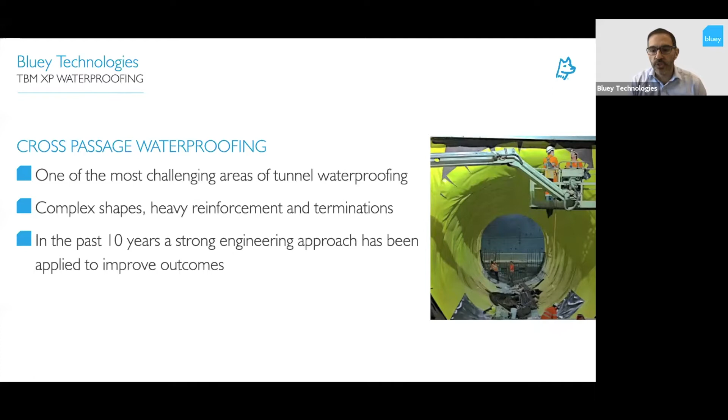So hopefully, by the end of this presentation today, you'll see how we approach it now and how we've taken an approach that puts some science into what we do and improves the outcomes.

So why do we need dry cross passages? You need it for durability of the structure, obviously, for the entire tunnel. It needs to be safe for access and egress, particularly in cross passages, because they're used for safety.

For the public to move from one tunnel to the other in the time of an emergency. And they often contain critical operation equipment as well, which can corrode. So you don't want groundwater getting in and affecting that equipment.

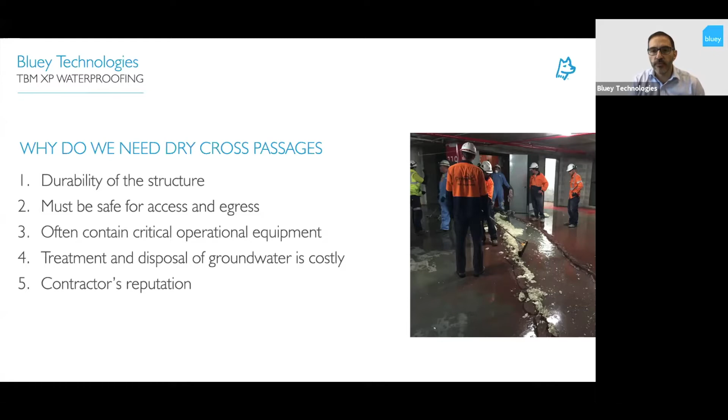Also, the treatment and disposal of groundwater is costly, so it adds to the total life cycle cost of the structure as well. And contractor's reputation becomes important when you have leaking cross passages. You have an unhappy client, I guess.

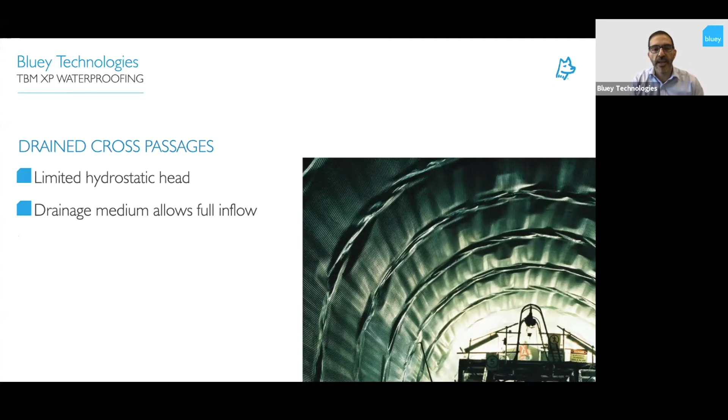So that's one type with lower pressure. And then also you have tanked cross passages, and this is where they're fully sealed all the way around, sealed to the tunnel itself, and full hydrostatic head is able to be created above.

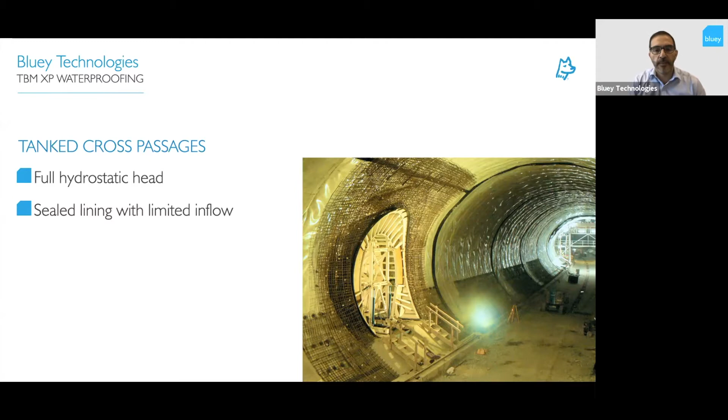And you could have 40, 50, 80, 100 meters of water head above that you have to seal against, and this is where we use a liner to seal on that.

So membrane selection - some of you who've sat in on the waterproofing basics last week will have covered some of this already, but I thought I'd just touch on the topics briefly again for those who haven't seen it, because it really is relevant, the type of membrane you select and then the type of installation methods as well.

So first, I thought I'd just quickly mention spray applied membranes. They do get used in cross passages because they're perceived to be fast to apply and they can conform to the curvature really easily. And as I said, cross passages are fairly complex structures, but they can only be applied to dry surfaces.

So the idea of trying to apply a spray applied membrane to that is always going to be a challenge. It's difficult to apply because of the dampness, also the quality of the rock. You also can't complete a pressure termination.

So where that membrane meets the segments, you can get a little bit of bond there, but you're only relying on bond. And then how do you connect that membrane through to the gaskets in the TBM segments? We'll talk about that in a moment as well.

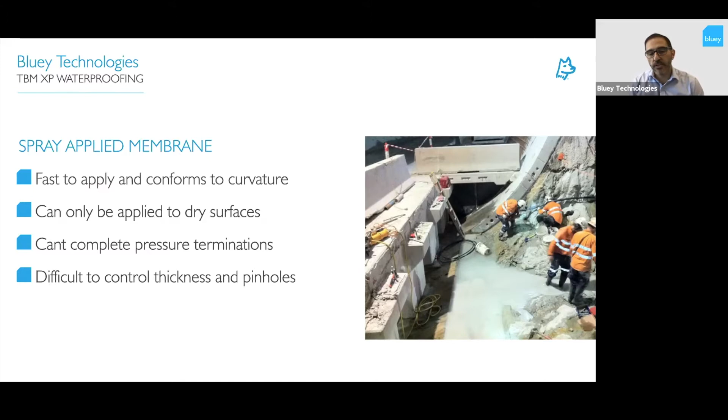So needless to say, I'm not a fan of using spray applied membranes in cross passages. I haven't seen many, if any, successful applications using those methods. So what we'll focus on is sheet membranes as the preferred method of waterproofing cross passages.

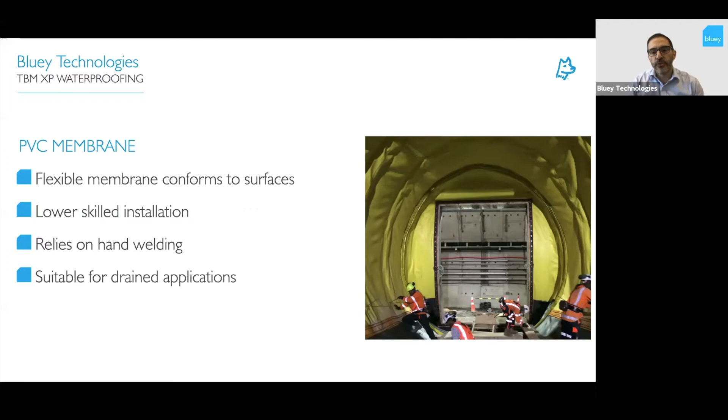So it's a flexible membrane. PVC is one type. There are two types we typically deal with. PVC being a softer membrane, it's a little bit more flexible, it'll conform to surfaces, usually requires lower skilled installation, relies on hand welding, mostly for the complex welds, and it's usually only suitable for drained applications rather than tanked applications.

VLDPE membrane, on the other hand, is a lot more robust. It can also be extrusion welded, and I'll talk about the different welding methods. It has the highest resistance to damage in a tunnel, which is important when you're dealing in such a confined space. It also has chemical resistance. It does require a higher level of skill from an application point of view, but it really is the membrane you need to use where you have a specification that calls for no damp patches and you're trying to resist high water pressures.

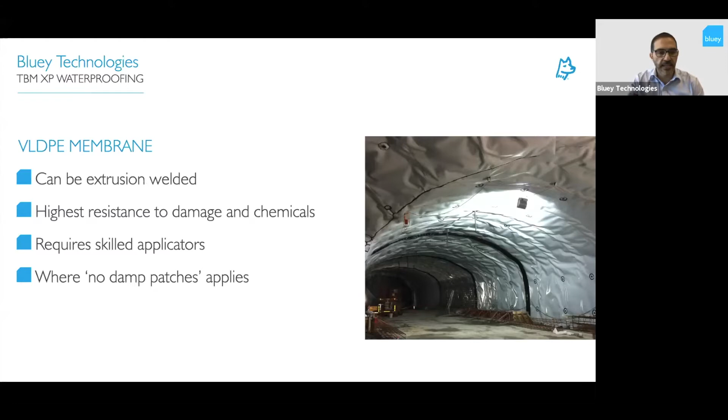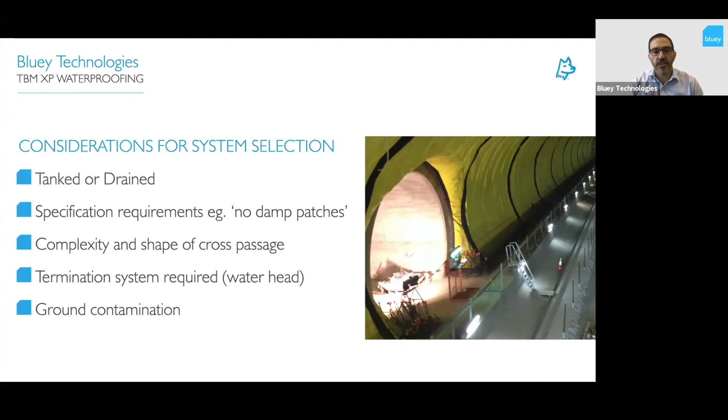So this would be the membrane you used in a tanked cross passage. The different considerations when it comes down to selecting a membrane: you need to ask, is it tanked or drained? Does the specification have certain requirements that need to be met, like, are there no damp patches required? Is there a complexity of shapes? Because cross passages are always in various shapes and require different types of welding. What is the termination system required and what pressure head of water are you trying to resist? And is there ground contamination? So these will determine what type of membrane you end up using.

So membrane welding, just to cover it off again, as I said, we spoke about this last week. Double seam welding is the primary welding technique. You use this as often as you can. In cross passages, it's a little bit more difficult to use this method of welding, just because there's so much three-way curvature. This type of welding works well in straight runs, but doesn't work well in curves and short runs. It's very reliable, provides consistent results. It's all machine and computer operated.

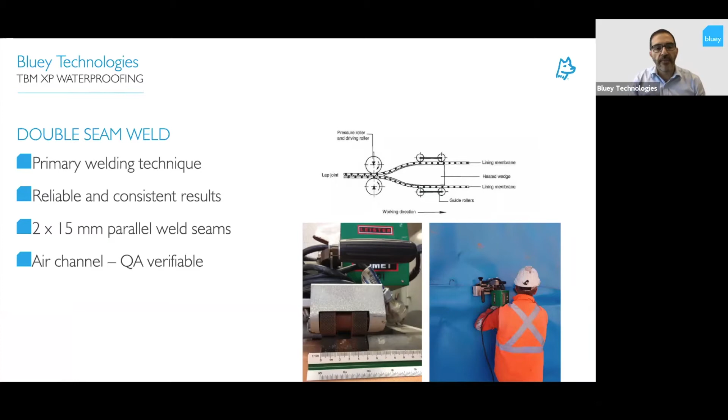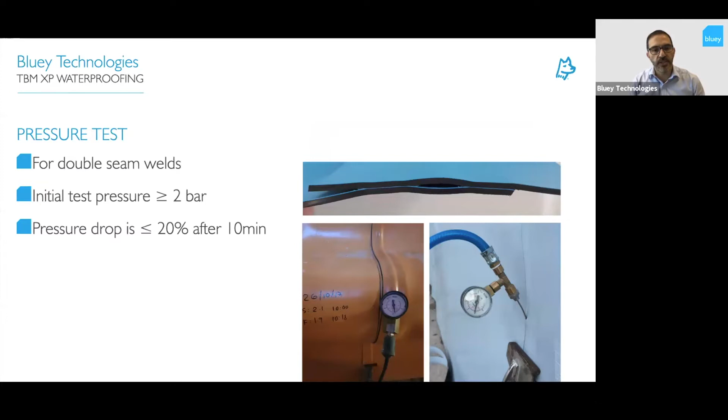As you can see, you've got the two rollers which create a double weld, and then you have an air channel in between, which means it can all be quality tested afterwards, as you can see in the photos here. So you've got the little air channel in that top photo, and you can see that the channel is being air pressure tested in the other two photos. So this is why the double seam weld is so reliable, but we can't always do that everywhere.

So where you can't do a double seam weld, you have to do a hand weld. And you can see in the photo on the right-hand side, all of those little black lines represent hand welds. That's been done with VLDPE, where an extrusion weld has been done over the top. So the black shows you that there's a hand weld in those locations. And as you can see in a cross passage, there's a really high density of hand welding required, which means that it becomes quite critical, because it's so commonly applied in a cross passage.

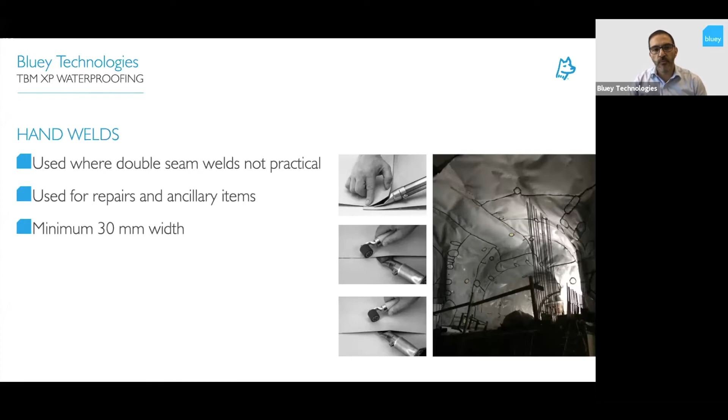And it relies on the applicator putting heat in, hand rolling, as you can see in those photos. So on its own, it's not so reliable, but that's all you can use in PVC type membranes.

When it comes to VLDPE membranes, you have the option of doing that extrusion weld over the top. And you can see in that top photo, the black HDPE, which has been molten and put over the top of a hand weld. And that provides a double weld, a second layer of protection on that weld to make sure that it's sealed. And it's only available on a VLDPE type membrane, which is why we use VLDPE membranes in critical applications, because you've got that double welding system. Not to say that we don't use PVC, I would say it's a 50-50 choice between the two, PVC and VLDPE. You just have to be mindful of the difference when selecting the membrane for the application.

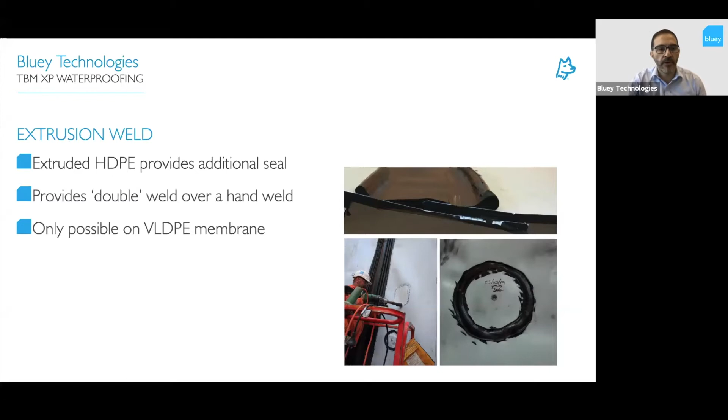So that's a little bit on membrane. Getting into actual cross passages themselves now, we can start talking about how we terminate the membrane to the TBM segments, because this is a really critical part of cross passage waterproofing.

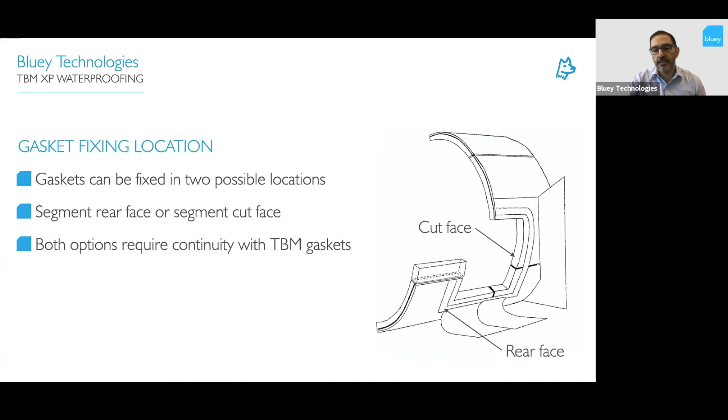The waterproofing membrane can be fixed in two locations. You can see in the diagram it can either be fixed to the cut face, where you saw cut your segments to create the opening, or it can be fixed on the rear face. I'll talk about both options in more detail, but both require continuity with the TBM gaskets—there has to be a seal between the fixing of the membrane and the gaskets in the TBM segments. Rear face fixing is being fixed to the back face of the segments.

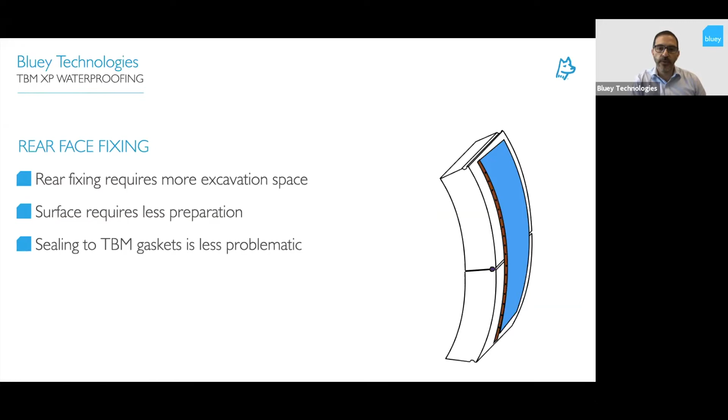The disadvantage with rear face fixing is that you need a bigger excavation face. You'll see in some of the photos I'm going to show that to be able to expose that rear face, you have to excavate out further. You have to allow space for a drill to get in there to drill those fixings, and it's actually quite a lot of extra excavation required to create that space. So you've got the advantage of a potentially better seal, but the disadvantage of needing more excavation space.

When you look at cut face fixing, you don't need as much excavation—you can just excavate straight up to the line of the cut, you don't need to excavate behind. Sure, it requires a lot of extra surface preparation because that cut face is going to be rough, it will have defects in it, and it may have the edge of the segment exposed, meaning dowel bar holes and other things that have to be fixed. There's also the internal corners where the vertical and horizontal faces meet—that becomes a bit of a challenge to create compression in that area, and also to make sure that area is clean and ready to accept a compression seal.

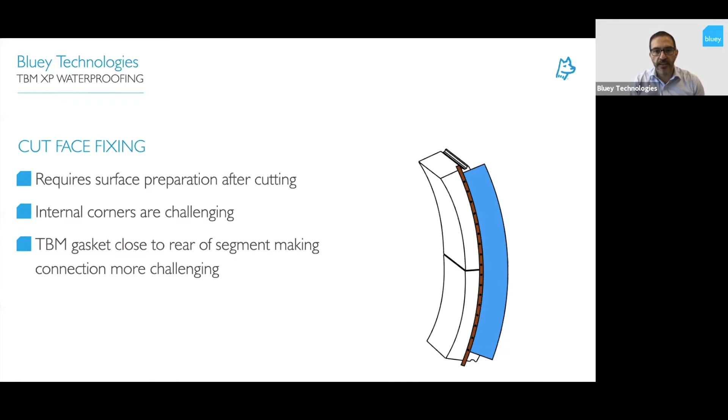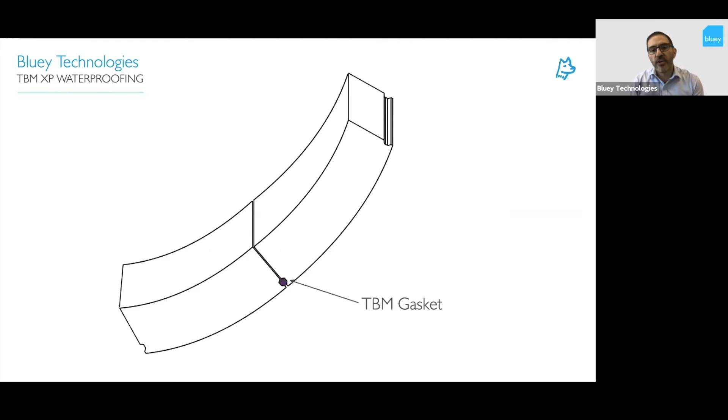What's caused more problems over the last couple of decades is that when you look at TBM segments, the gasket is actually moving further and further to the back of the segment, to the point now where I think the gasket has moved as far back as it possibly can, and it's been realised that that is the ideal position for a TBM gasket.

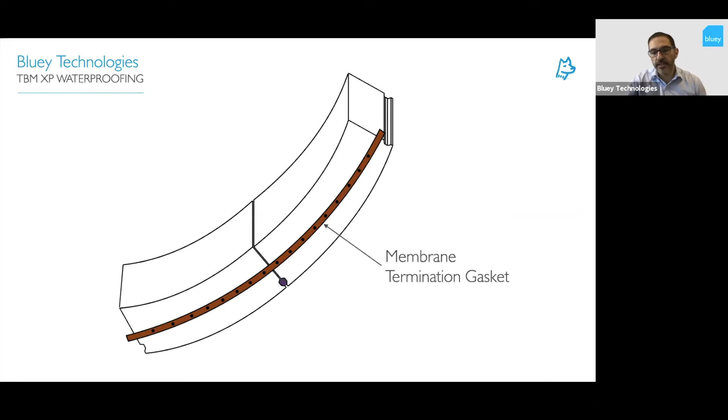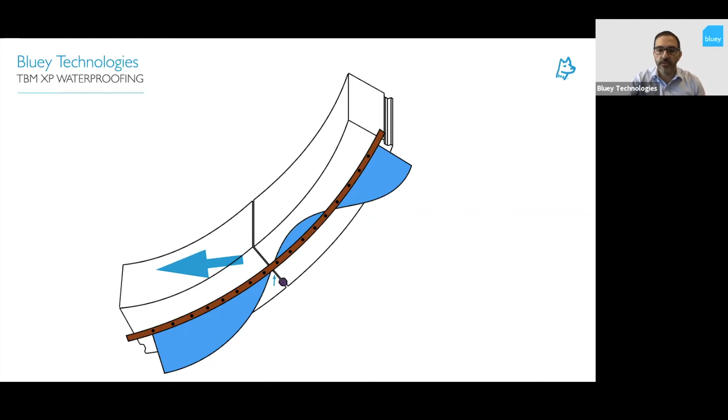When you go and put your compression seal ready for the membrane on, there's a gap between the two—that'll be at the midpoint of the segment—and then you'll attach the membrane. Just lifting that membrane back up, you can see that it creates a discontinuity between the TBM gasket and the compression seal you're creating. This is one of the most challenging areas in terms of achieving the waterproofing, because water can go in at that point, go around, and come out the other side. So it's really important to create that seal between the two.

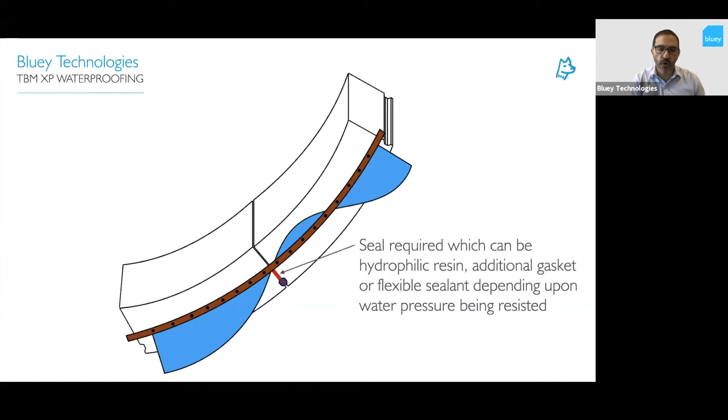That can be done in a number of different ways. It can be pre-injected into that joint with a hydrophilic resin. You can put an additional gasket in, or a flexible sealant between the two. It all comes down to the amount of water pressure being resisted, which determines the type of sealant, as well as the movement that's expected—whether you need something to accommodate large or high movement. But this has to be engineer designed, in the same way that the compression seal has to be designed, which I'll go into in more detail.

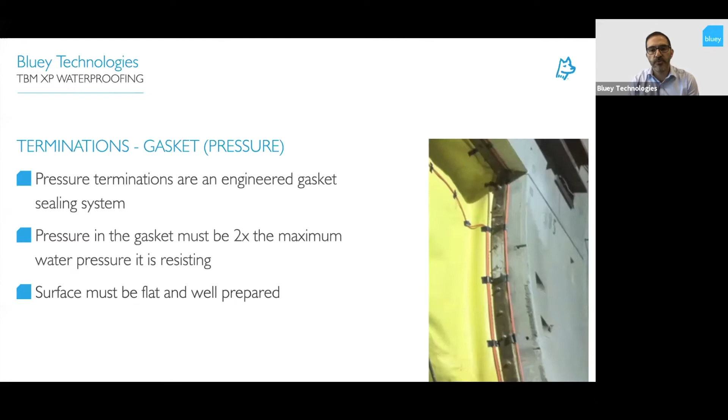The surface must be flat and well prepared. We use a couple of models to determine how this system is designed. We design the plate and the plate thickness, the plate width, the gasket hardness, the gasket thickness, and how much we compress that gasket to tell us how much pressure we're going to be resisting. So that's all part of the design.

For a typical 80-metre design, and this has been tested on a number of cases as well as being theoretical, we've set up mock-ups and tested this for projects. For a typical 80-metre design, you may end up with a 10-millimetre thick compression plate, quite a thick plate, 100 millimetres wide, with a 12-millimetre thick gasket with a hardness of about 50 to 65 Shore. And we'll typically compress that down to about 50% of its thickness.

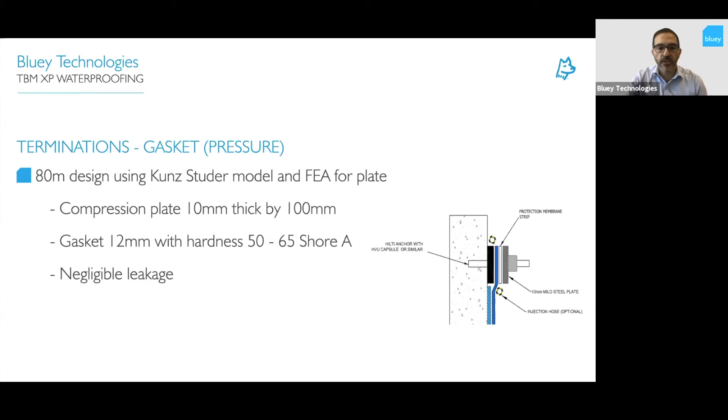That's how you measure it, and you ensure that you've got the seal, and you've got to be able to maintain that compression between the fixings as well to achieve that negligible leakage. So it's all part of the process of design, then install, then checking to make sure that you don't get any leakage. So that's compression gaskets.

We also utilise epoxy terminations in certain applications. They're typically only suitable for dry surfaces, which makes them a little bit problematic for cross passages. I don't like them for TBM cross passages simply because they don't have the flexibility needed. We all know that TBM segments will move as the pressure increases, and the epoxy won't tolerate that movement. So I would say that epoxy isn't suitable for TBM segmental line cross passages where you're going to have movement and where you have water pressure.

It is faster to apply, so it can be used in certain situations, maybe where you have a drained cross passage, particularly in a mined tunnel rather than a TBM tunnel.

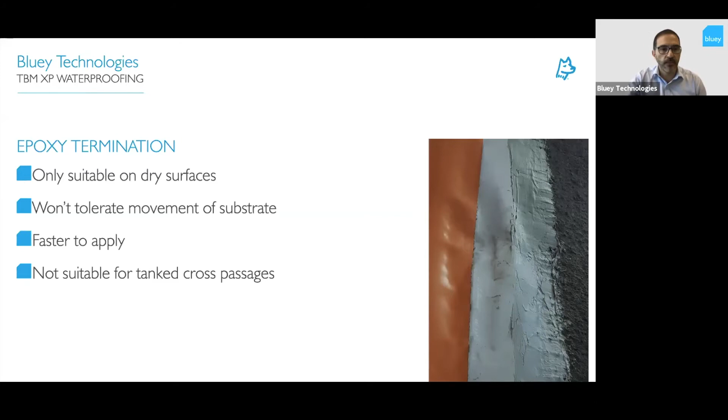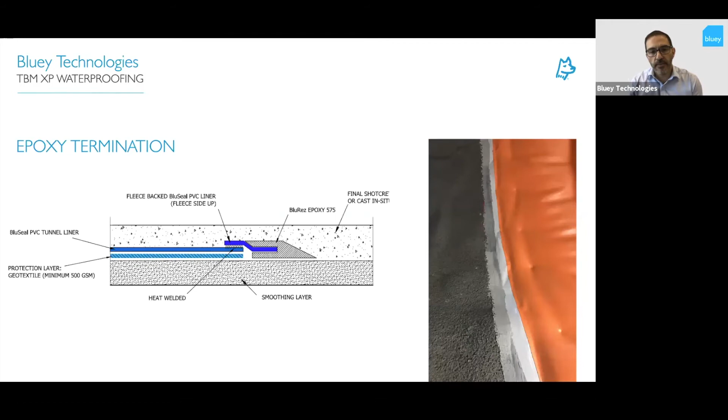This is how an epoxy termination looks. It's a piece of membrane which is fleece backed. It's bonded to epoxy, and then the membrane is welded and becomes continuous with that.

Some of the other waterproofing details to be considered are anchorage. So when you need to make fixings through the membrane, you obviously don't like punching holes in your membrane. So there are systems, the BA anchor is used, where you can install that into the rock. It has a sleeve around it which completely encapsulates the fixing, suitable for up to about 20 kilonewtons, and you can fix your reinforcement to it.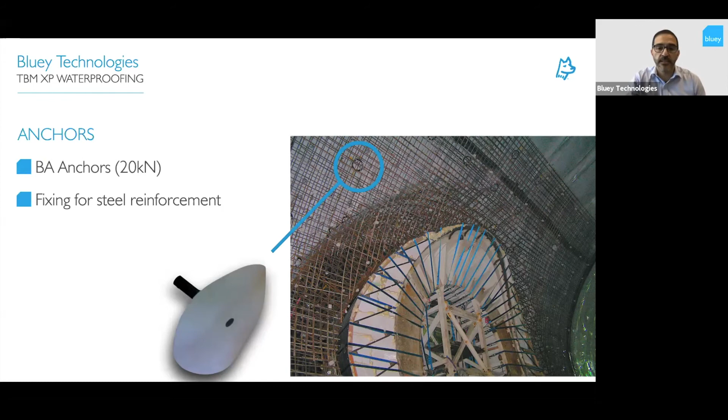You can see in the photo there, all of those little circles are BA anchors, which are holding that steel reinforcement in place. Steel reinforcement can be quite dense in a cross passage because the loads are quite high around that opening.

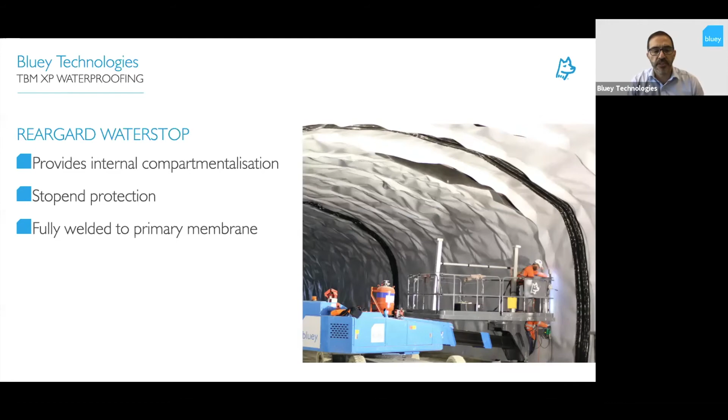Reargard waterstop is another thing to be considered. It provides internal compartmentalisation, and also provides stop-end protection. So where you're putting formwork in place, it'll protect the membrane from the timber or metal formwork. It's fully welded to the primary membrane, and what that does is it stops water from travelling behind the concrete, between the concrete and the membrane.

So if you do end up with a leakage in one spot because someone comes along in 20 years' time and drills a hole through your concrete and straight through your membrane, then that leakage will be compartmentalised to that one area. You can see in the photo that we pick areas of high risk like a cross passage, and that's being completely isolated and compartmentalised by that black line of water stop, taken all the way around the cross passage. Eventually that bit along the invert will also be connected and create a complete loop all the way around the cross passage, and that stops water from travelling from one compartment to the other.

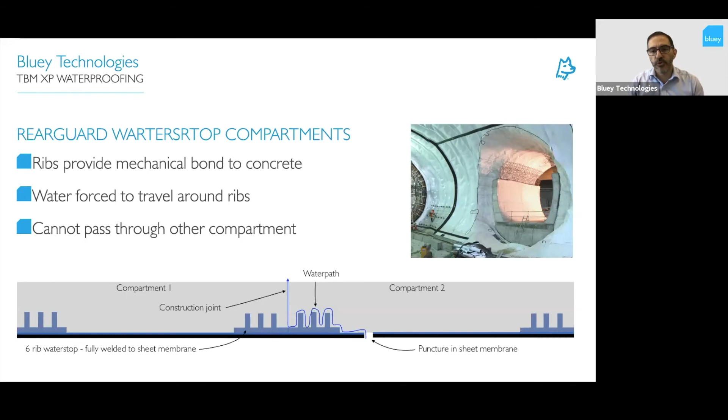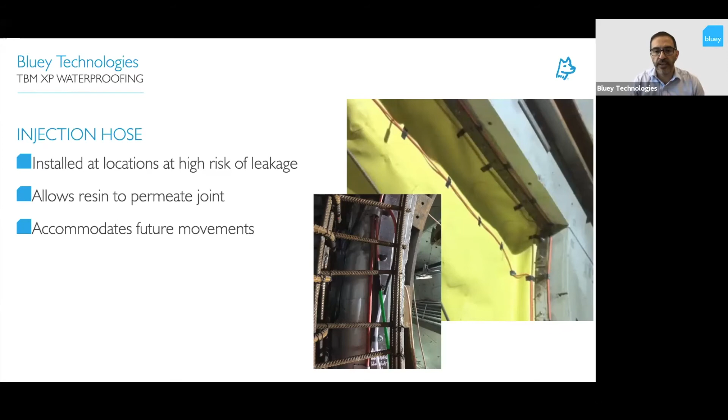We also use injection hose, and this is important in cross passages. We know that we get movement in the segments, and that can result in leaks occurring in the TBM segment gaskets themselves, even if your termination is completely perfect. So you want that ability to be able to inject that zone after you've installed it and after the pressure has come up. The injection hose allows resins to be injected into that area without having to drill later down the track, and they're a good insurance policy for later. So you'll tend to see these used a lot around terminations and cross passages.

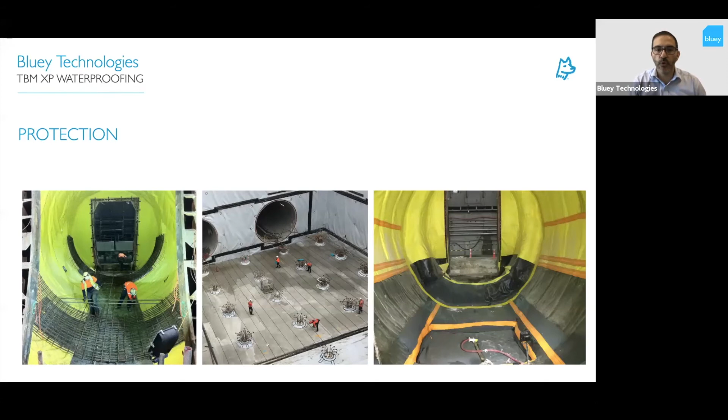Less likely to use a blinding layer in cross passage for a few reasons. One, it's difficult to get in there. Two, it actually takes up thickness, so you'd have to excavate further. That's not always desirable in a cross passage, and typically the turnaround times are too fast. So the membrane will be installed, the reinforcement installed, and it'll all be concreted up within a matter of weeks. So there's not a lot of exposure time.

You also have to consider dewatering while the membrane's being installed, particularly in tanked design. Once the membrane is fully sealed up, you will need the availability to be able to draw that water from behind the membrane, the groundwater that's building up, so that pressure doesn't build up behind it. So you need to think about how that's going to be connected to your membrane and then how it will be capped off later.

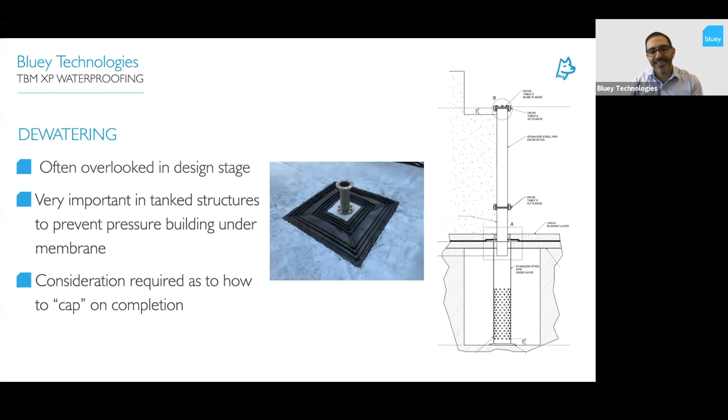And there are certain designs for being able to do that, and it is often overlooked during the design stage. It's something that comes up once you're actually on site. You realise you've got a lot of groundwater to deal with, so a system needs to be implemented. But it's good to have it prepared in advance.

Some of the construction considerations, things like formwork fixings are important. Quite heavy formwork around cross passages quite often has to be fixed through the membrane. How do you do that? We use things like BA anchors. We also have options for GRP dowels to be put through the membrane and sealed off. So there are ways of doing it, but it is something that needs consideration.

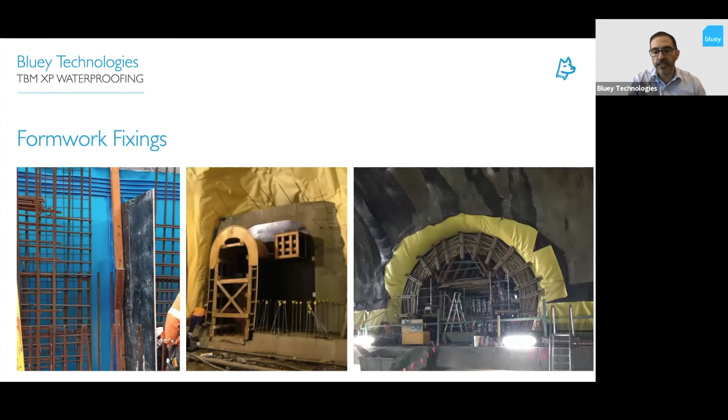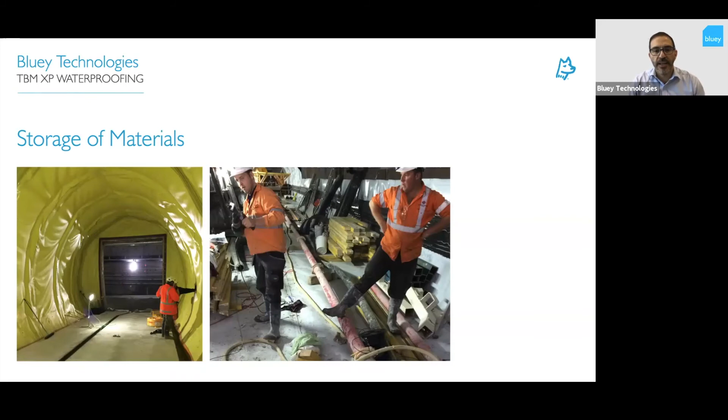Storage of materials afterwards - is there a place to store my materials that are coming in to be used once the membrane's installed? You can see photo on the left, good outcome; photo on the right, pretty bad outcome. You can see the storage of materials there on that membrane really is possibly going to cause some damage to that membrane.

Fire safety - when you have lots of plastic installed in a very small confined space, certain systems have to be implemented to maintain fire safety. You don't want rolls of membrane piled in locations. You obviously want to be careful with your hot work and other things that you're doing around the membrane, and you want to have enough safety mechanisms in place if there is a fire to be able to put that out.

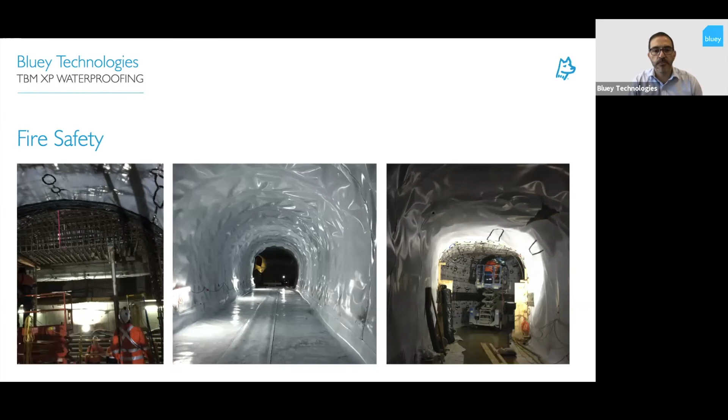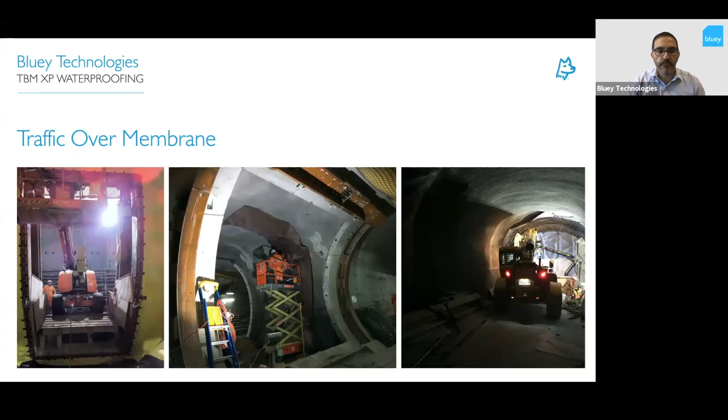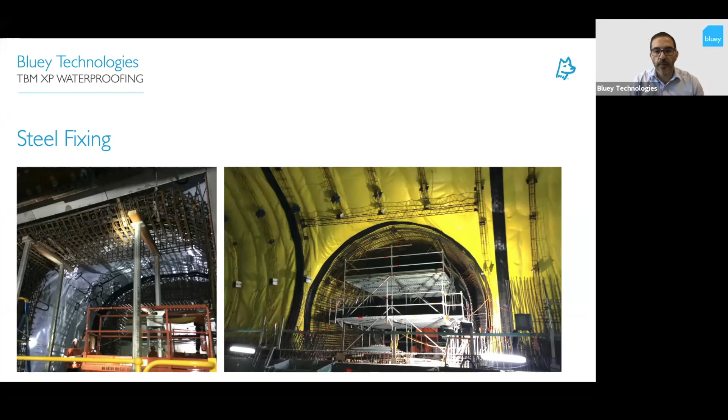Steel fixing - very high density reinforcement around cross passages. So it needs to be designed either through the use of lattice girders, as you can see in the right-hand photo, some sort of mechanism for holding it in place, or the BA anchors or something along those lines. It does become a pretty big consideration in cross passages, how you fix your steel reinforcement.

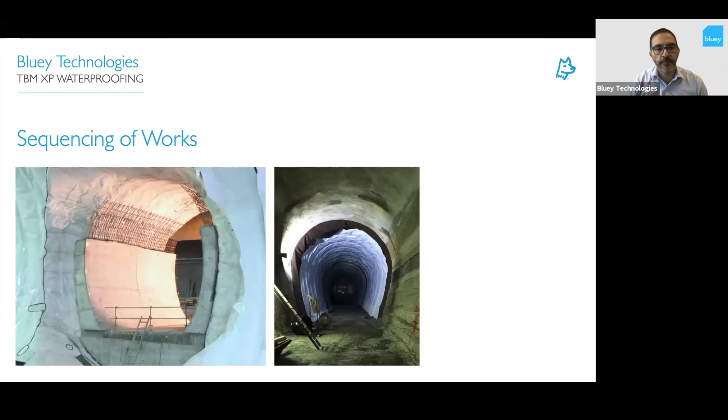And then finally, sequencing of the works is important. Ideally, you can get in there and install your membrane all in one go, if that can be worked in as part of the design. On the other hand, sometimes you have to go in and make 2 or 3 attempts to get the membrane done. You might be doing your invert first, your entry, your exit points, and then your crown last. Makes it a bit more complex. So sequencing of the works needs to be taken into consideration.

So that's the broad overview of how we complete waterproofing in cross passages.

What I have now is a sequence of photos taken from Airport Link on 2 different types of cross passage that we completed up there. One was completed using steel set openings, and this was the method that was also implemented on the Waterview project in New Zealand. I'll take you through the alternative option, which is the more common option of just having to cut segments.

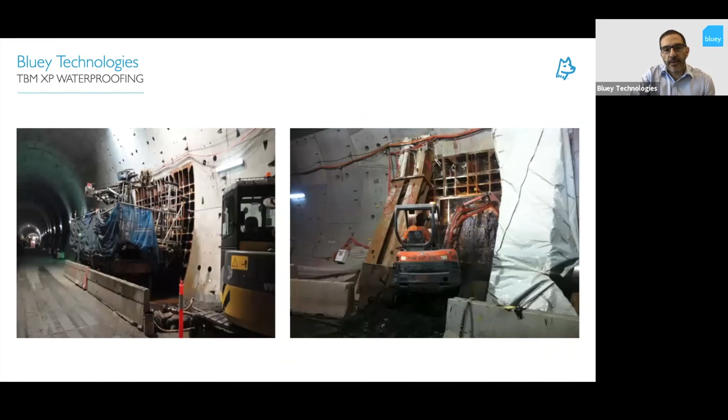So, this is just a bunch of photos which will give you an idea of what was done. These are the steel segments, as you can see, that were placed when the tunnel was constructed, which makes it really easy then to just open up the cross passage and start your excavation.

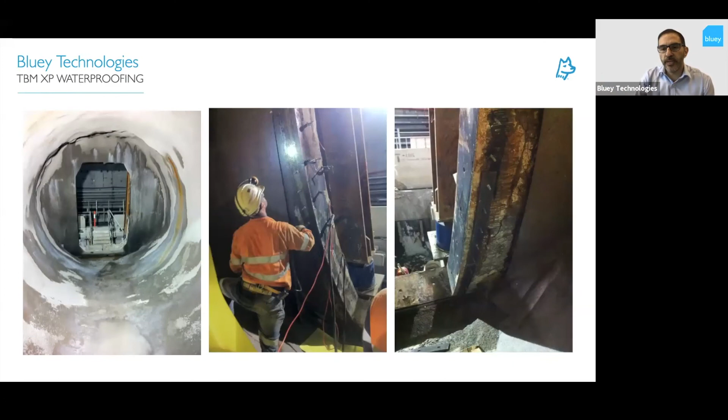What it also does is help us with installation of the compression seal. As you can see, we're using steel segments. We've used a stud welder and we're welding the fixings directly to the segment. We're able to fix our compression seal directly to that, making it a lot easier, with a much smoother surface to deal with and much easier to connect to that segment gasket.

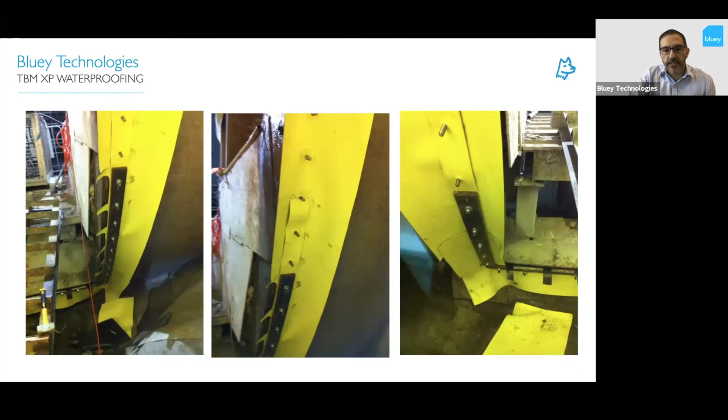So just flicking through the photos, you can see the compression gasket going into place and all of the fixings.

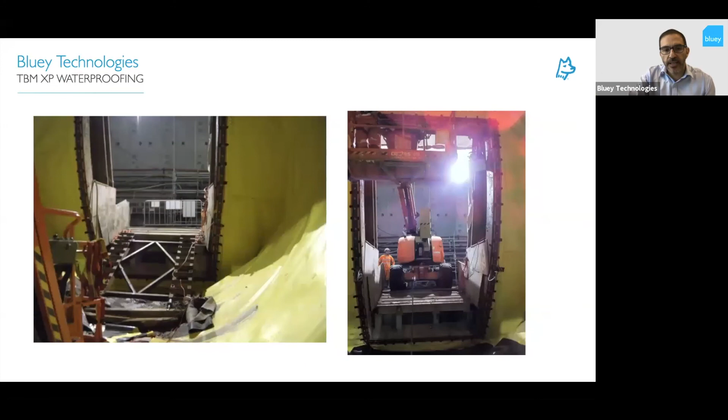The access over the top, obviously doing the crown first, coming back to do the invert last. Access into the cross passage becomes important. You can see the injection hoses around that compression seal.

The protection layer going in and the steel reinforcement being laid.

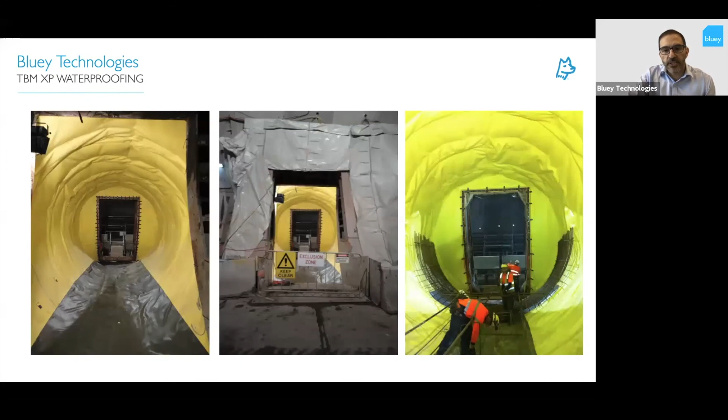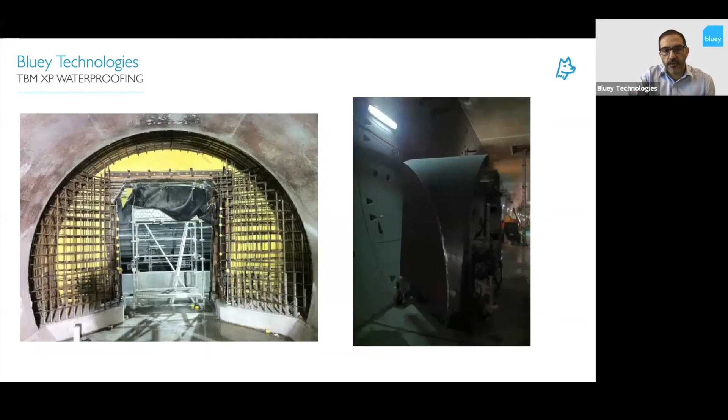Concreting works about to start, concreting the internal. And then there's your finished product with the steel sets, and obviously the concrete encasement of those steel sets as well.

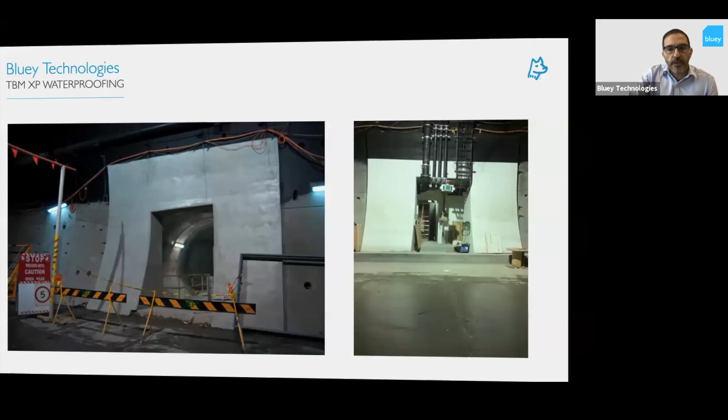Moving over to the cut segment openings, you can see there the concrete segments have been saw cut across the top, and then the whole segments have been removed to create the vertical part of the opening.

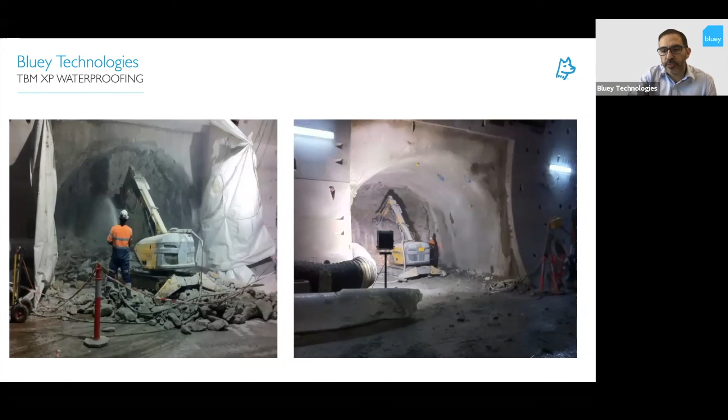You can see there's a lot to deal with, particularly in that right-hand photo, in terms of being able to prepare that surface ready for a compression seal.

There are openings in the concrete segment that need to be sealed across. You've got shotcrete across the surface, and also that top internal corner to be dealt with.

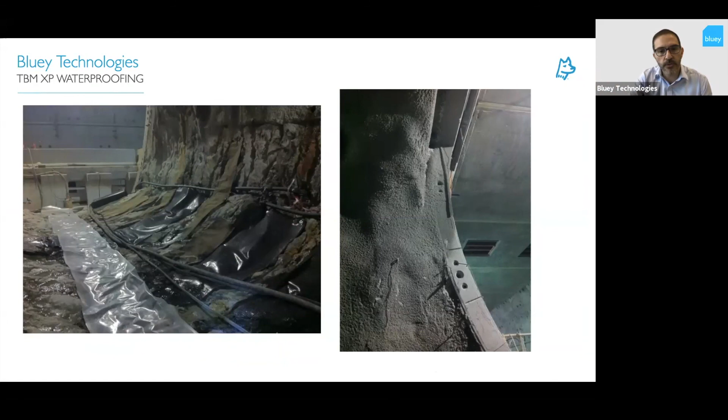And there's a better photo of that top internal corner, and that's what I was talking about earlier, needing to repair that. This is a cut face fixed membrane.

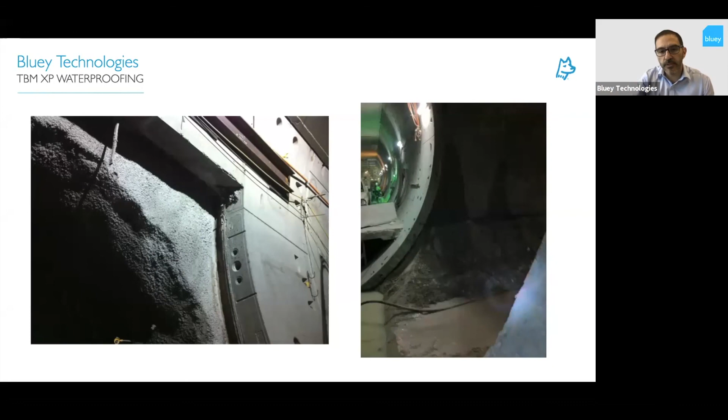So you can see there that the excavation actually comes right up to the segment. It doesn't have to go behind those segments to create extra space, and you can see that in these photos as well.

Coming back to that other photo that I mentioned, it would have been difficult to apply a spray membrane in this circumstance, but you can see we pushed ahead with a sheet membrane, dewatering as best we can, but still able to install that membrane effectively.

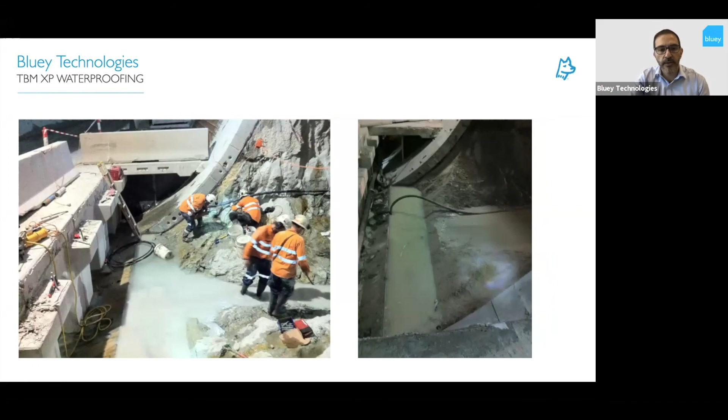You can see a lot of the welding detail that goes into this, a lot of three-way curvature to be dealt with. So in this case, it was a PVC membrane that was used.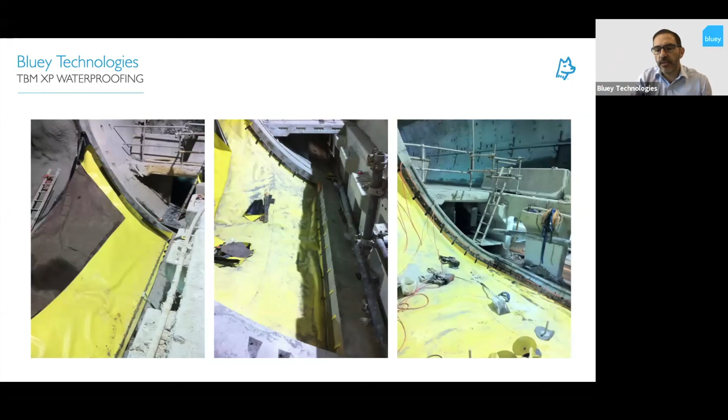You can see it being installed, and on that right-hand photo, the lobster backing, and the middle photo as well, just to be able to deal with that three-way curvature.

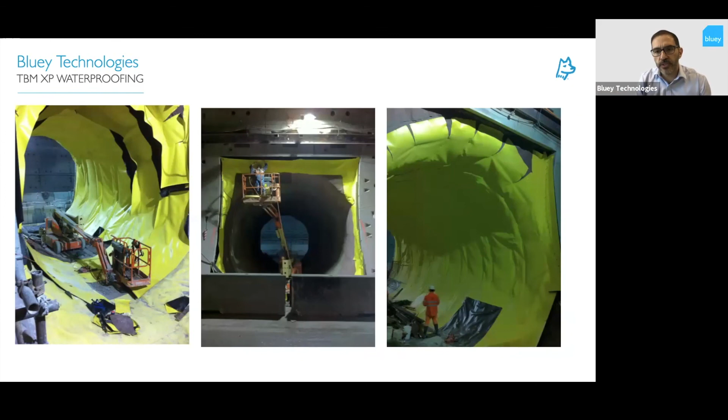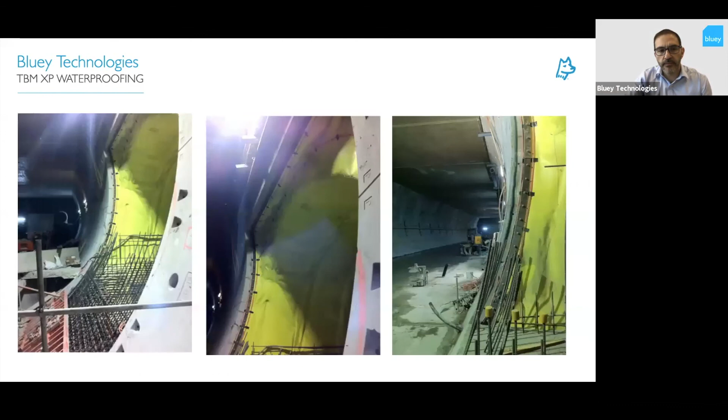And the compression seal being finished off, ready for concreting, reinforcement to be installed. A bit more of the injection hose.

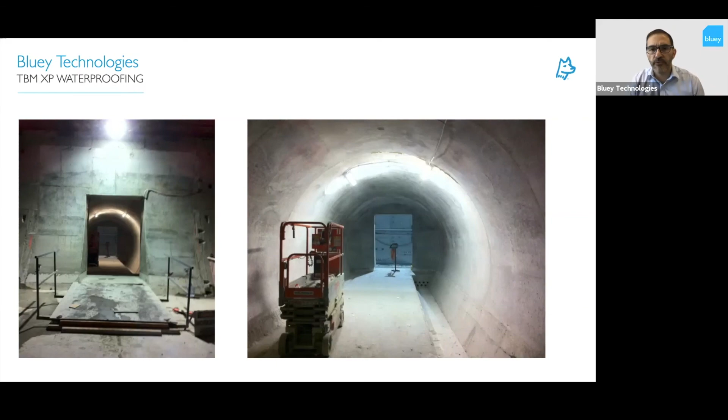And then, of course, at the end there, this is what you want a cross passage to look like, nice and dry. This cross passage was probably 40 or 50 metres below the water table, but no sign of leakage. If you've done your work properly, this is what you hope to end up with.

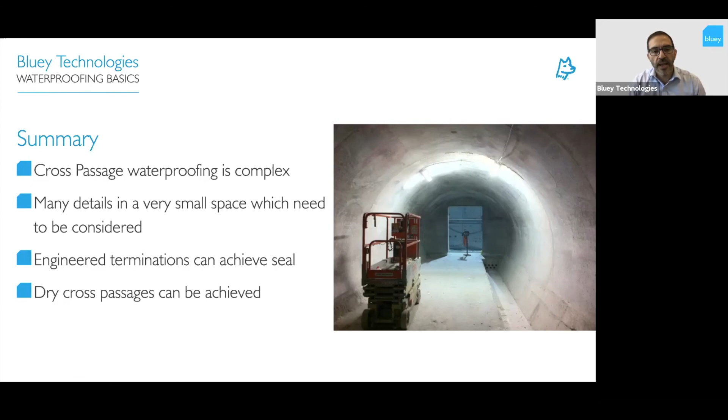So just in summary, cross-passage waterproofing is a really complex area of tunnel underground waterproofing. There's a lot of detailing to be completed in a very small space, so you have a very high concentration of complex activities. The engineered terminations are probably the most challenging part of that, but you can design those so that you achieve a seal, and you can build them so that they can resist high pressure water, and you can achieve those dry cross passages.